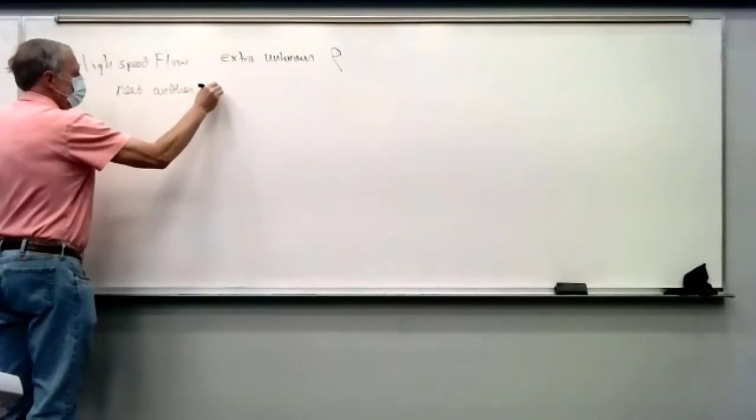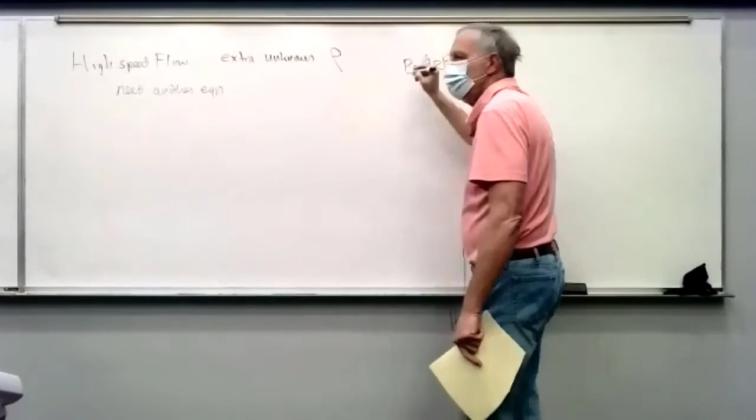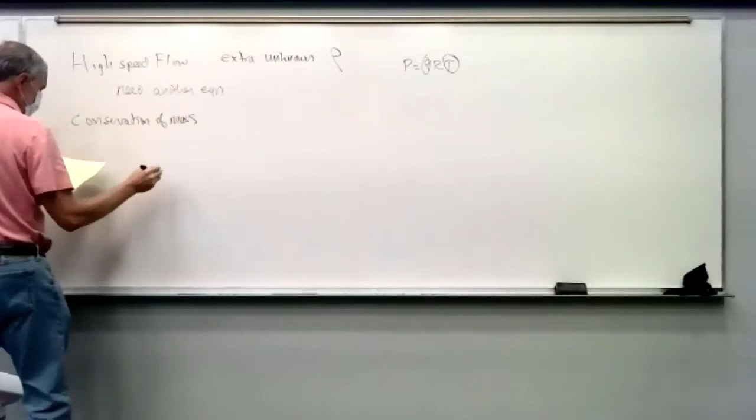And we do have ideal gas, but then that introduces another unknown, temperature, along the way. So we still need another equation. And right now we have conservation of mass. And again, this is for one-dimensional steady flow, but it relates these variables to the variables at spot 1 to spot 2. And then we have the momentum equation,

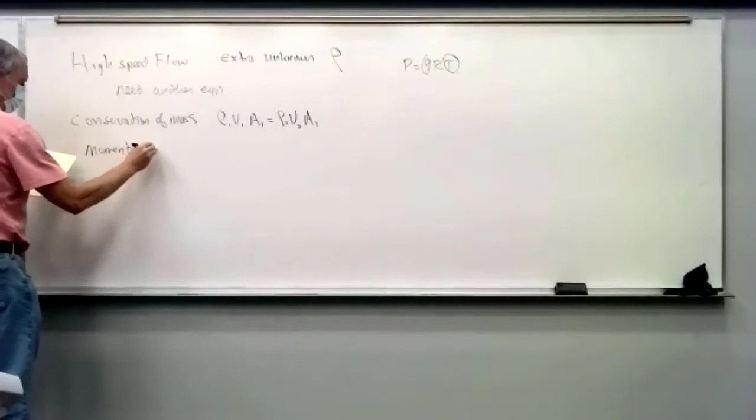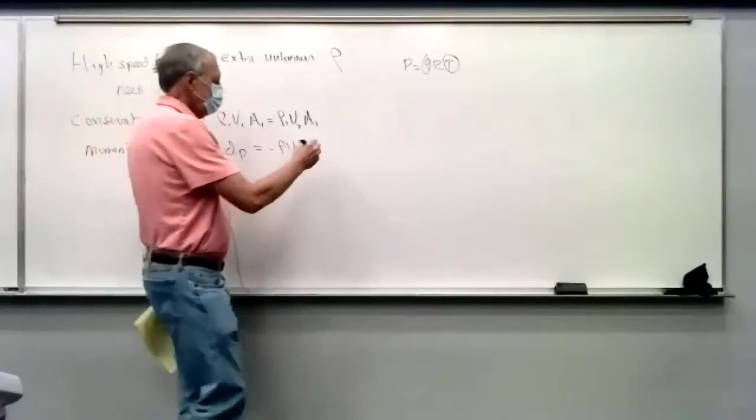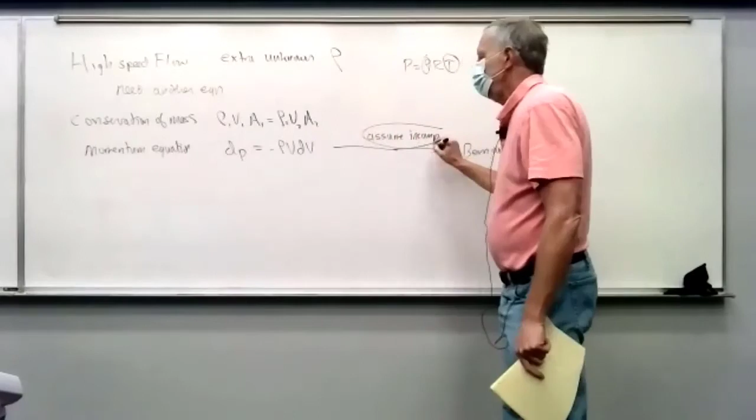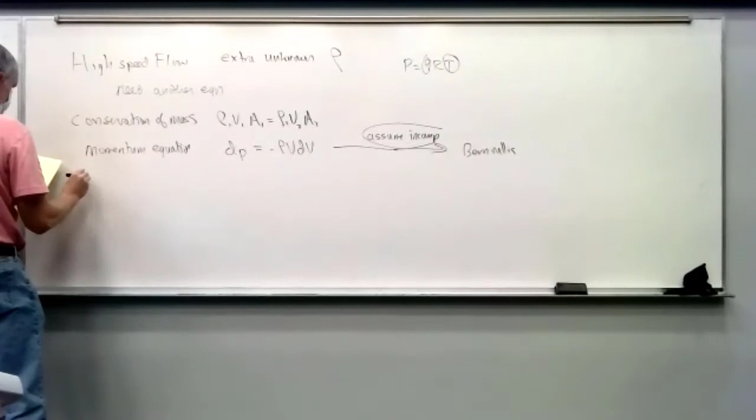which tells us how pressure changes related to velocity. And that's the one that if we assume incompressible, then we get Bernoulli. But if we don't have incompressible flow, then the density changes and we need another equation. So we're going to use that one, and then we need conservation of energy.

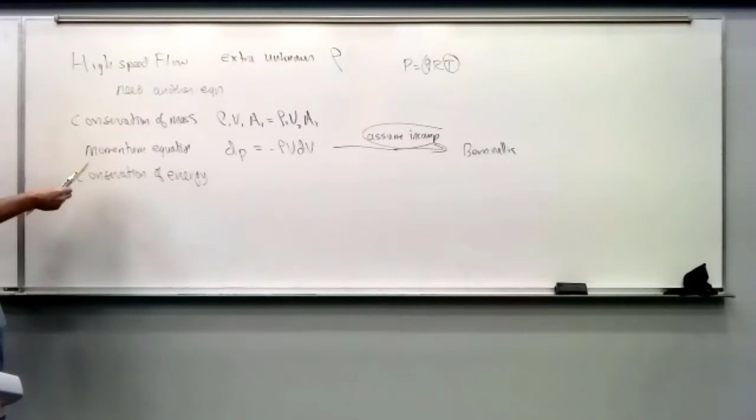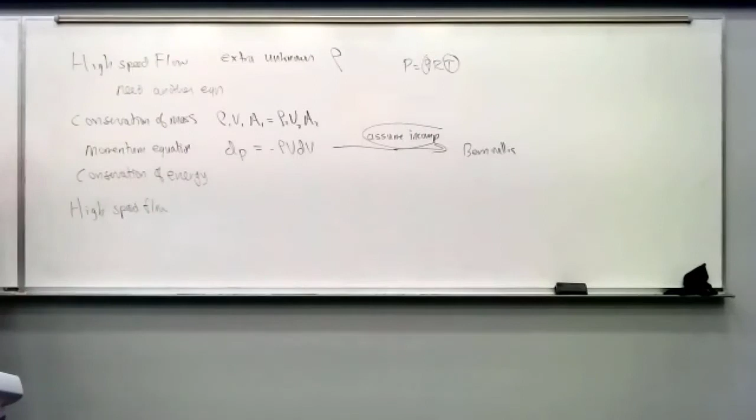And the main reason that this equation comes into play is if you have high-speed flow, so flow going really fast, and let's say we run it through a duct where it slows down, so the velocity is going down because the area is going up, conservation of mass. When that flow slows down, we get high pressures.

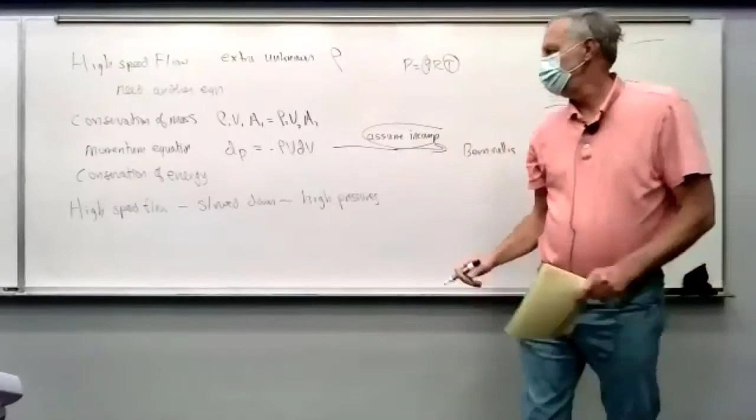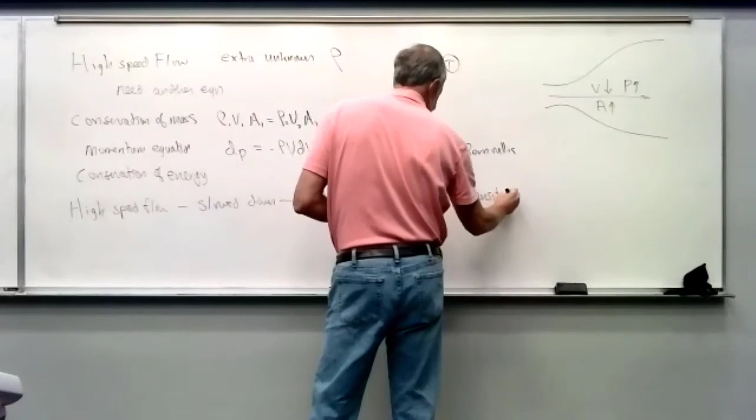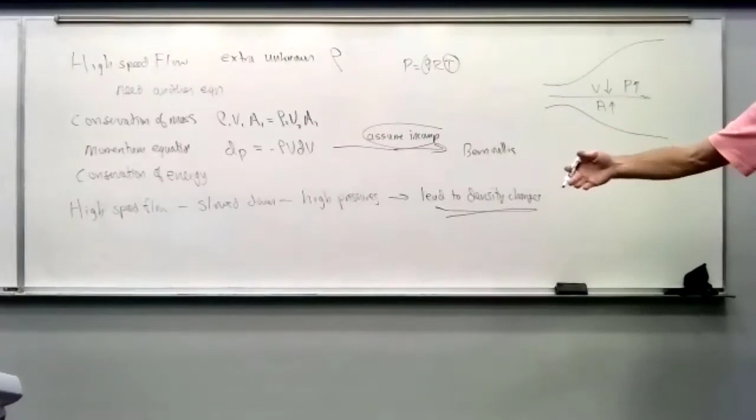Right? Remember, when the velocity is going down, the pressure has to be going up because that's the force that slows the flow down. We get high pressures, and those high pressures can lead to density changes. Remember, that's the whole deal behind incompressible versus compressible flow. If you don't have high pressures to squeeze the air, you're not going to get a density change.

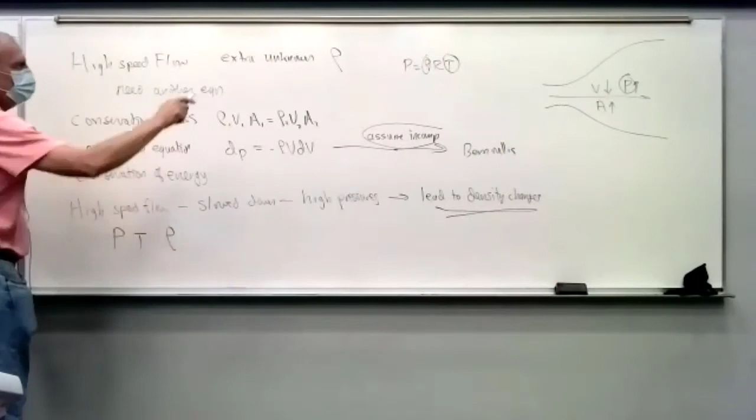That's why we said water is incompressible even at high speeds, because it does not compress even with high pressures. But for air, for a gas, you get high speed flow, it's slowed down, you get high pressure, and so you get density changes. And so we need to relate P and rho, not just with the ideal gas, but we need the conservation of energy. So this requires thermodynamics.

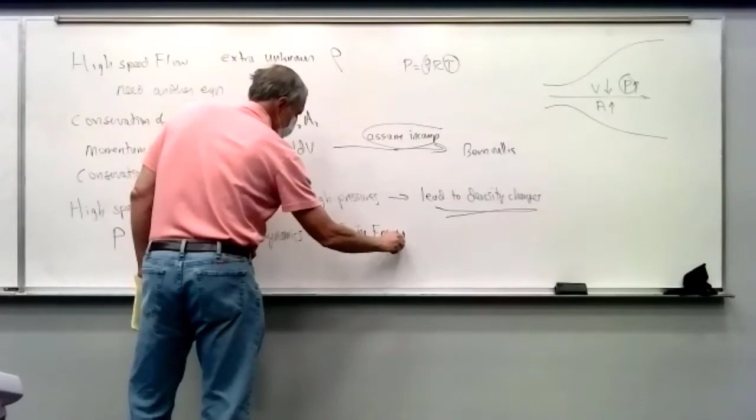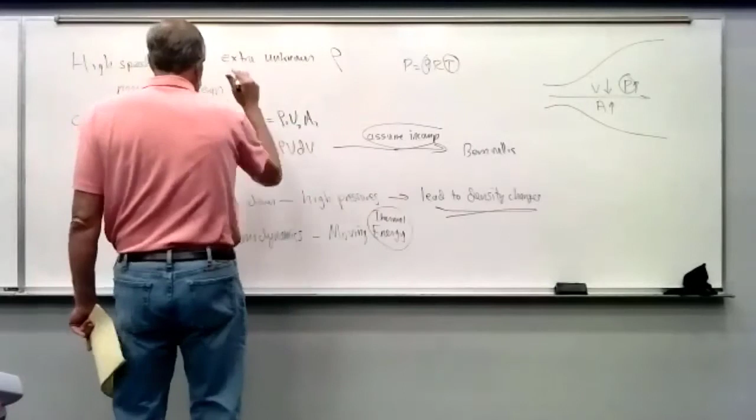Because thermodynamics is moving or changing energy. Thermal energy. And the conservation of mass, the momentum equation, this is dynamics. This is moving masses. So that's moving energy, this is moving masses, and that's just basic dynamics.

And then aerodynamics is named that way because it's moving air. So dynamics is moving masses, aerodynamics is moving air, thermodynamics is moving thermos, or moving temperature energy.

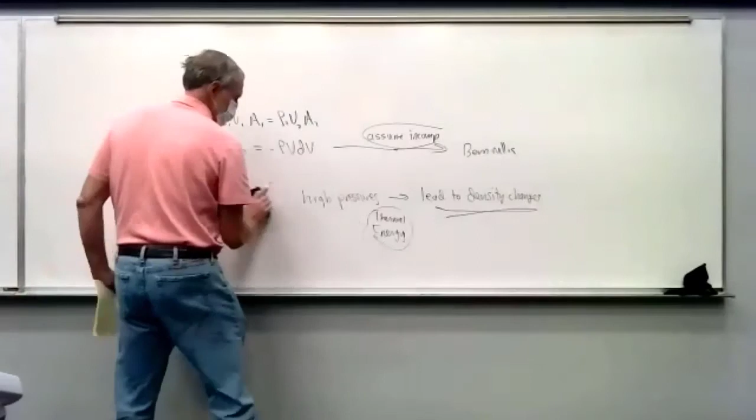And that's the first law of thermodynamics, is conservation of energy. So we have to remind ourselves of some terms in thermo. You guys are taking thermo now or have had thermo, right? So this is actually going to be easier than a lot of the stuff you do in thermodynamics. So here we have a system of gas molecules.

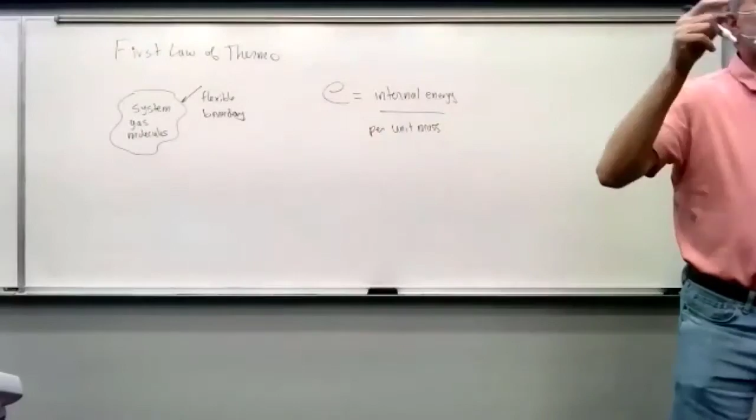And we say the system is contained within a flexible boundary. And we talk about the internal energy in the system, and it's internal energy per unit mass. Just like density is mass per unit volume, or specific volume is volume per unit mass, we don't have a chunk of stuff. We say, okay, we want to do it per unit mass.

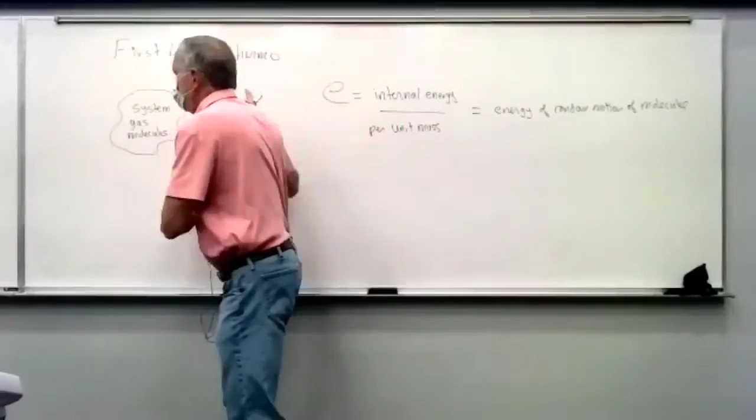And this is the energy of random motion of the molecules. So that's all the molecules moving around randomly. If there's ordered motion, if that whole system were to move to the left, that would be dynamics. But we're looking at the random motion as what we sense as temperature. So it's the energy per unit mass.

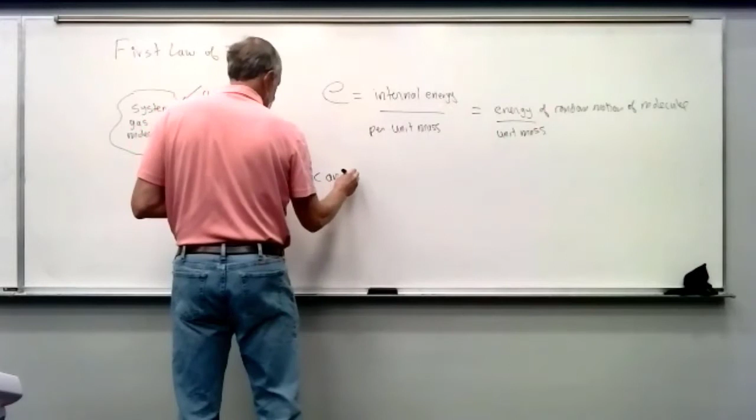And the first law of thermo says E can change due to two things. And the change is dE. So E is internal energy, dE is a small change in internal energy. And you can get a change in energy due to heat transfer in. And here, in is positive. So obviously heat coming in is going to raise the temperature.

And that's called δq. So it's a small change in energy. And it's per unit mass, just like everything else. And then we can do work on the system. In other words, we can push on the boundary, squeeze the molecules together. Temperature, density, pressure are going to change, and that's called work. And work done on the system is positive. So if we push and squeeze it, and this is per unit mass.

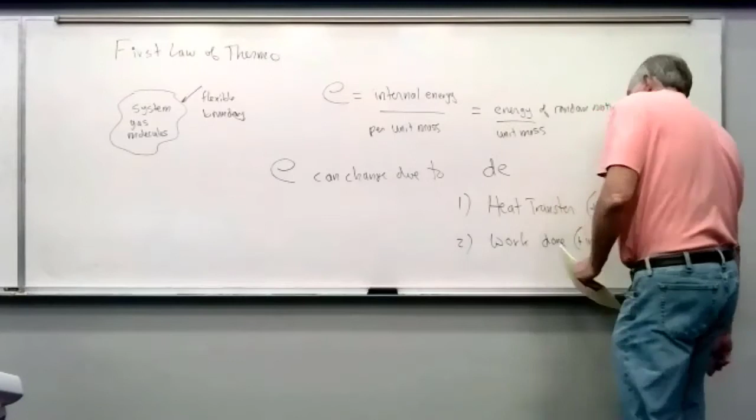All right, so we can change the energy by putting heat or by pushing on the system. And that gives us the first law of thermo, or the energy equation, that says putting heat in and doing work on the system changes the internal energy. This is the first law. It's the conservation of energy.

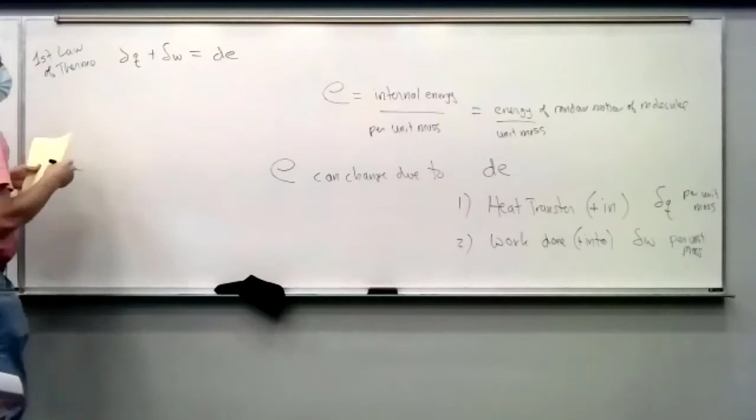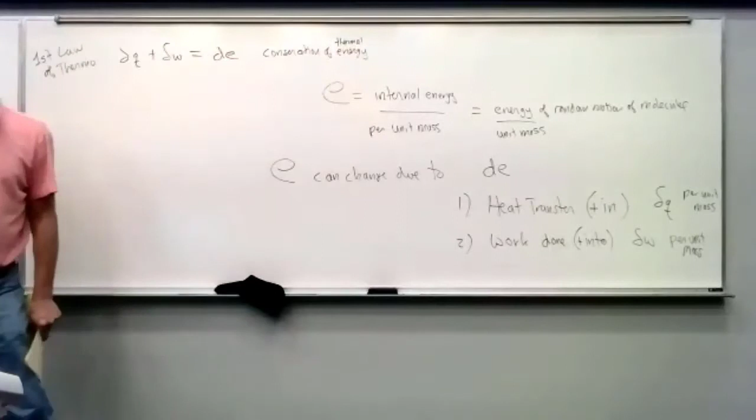So in this class and most fluids, that's what this is called: conservation of thermal energy. That's different than the conservation of potential and kinetic energy for dynamics that we talked about before. This is the motion of the molecule.

All right, so we look at this, and I don't see pressure, I don't see temperature, I don't see density. These are all our fluid variables. So at this point, it's like this is totally useless. But fortunately, we can put these terms in terms of the fluid variables. So that's what's next. The first one we're going to work on is the work.

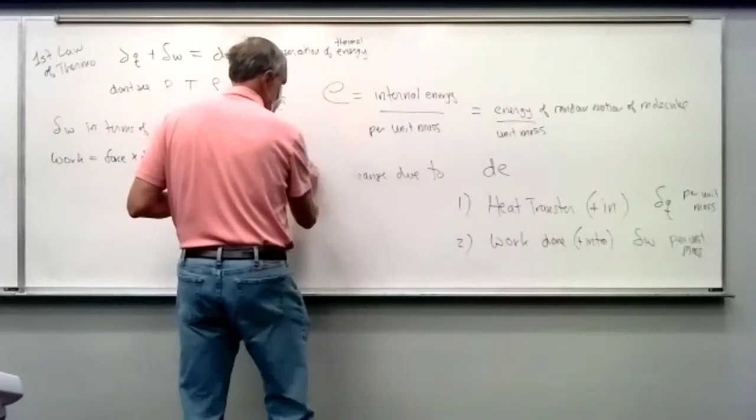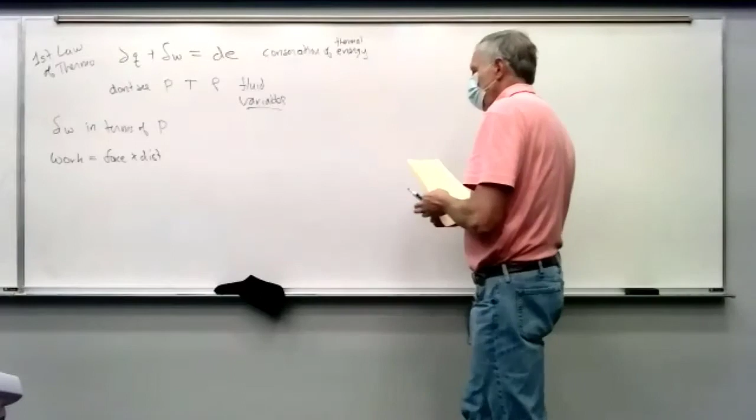And the work is going to be in terms of pressure because work is force times distance, and pressure is our force. So this applies to any kind of force times distance of our fluid, but I think a piston is the easiest way to see how this works. So imagine a container here.

So now I'm making the wall here rigid, but the piston here can move. And here we have a pressure, and so we're going to have a force on the piston. And if we allow it to move, if that force moves a distance ds, then that's our work. And that's work out. It's the system doing work out, so that's the opposite of work in, so that's going to be negative.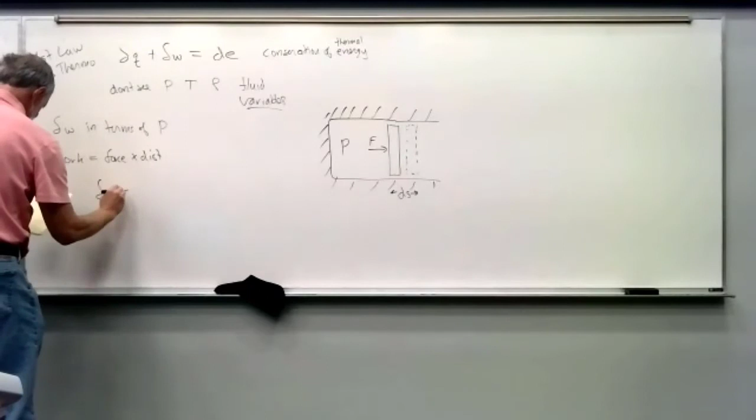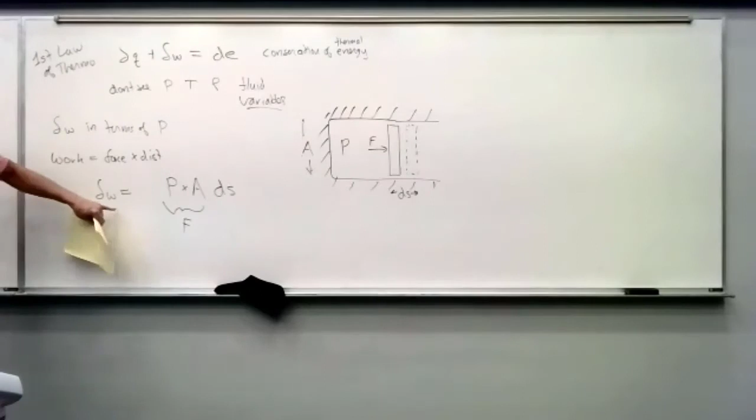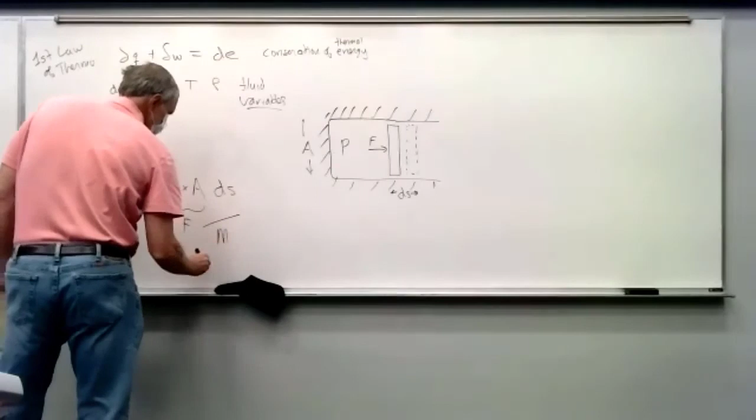So pressure times the cross-sectional area here is how we're going to get our force. So pressure times area gives you the force. And then the distance is that ds. And so we're doing a small work over a small distance. So that's going to give us our differential work. And remember, this is per unit mass, because that's how work is defined. So here's force times distance per unit mass.

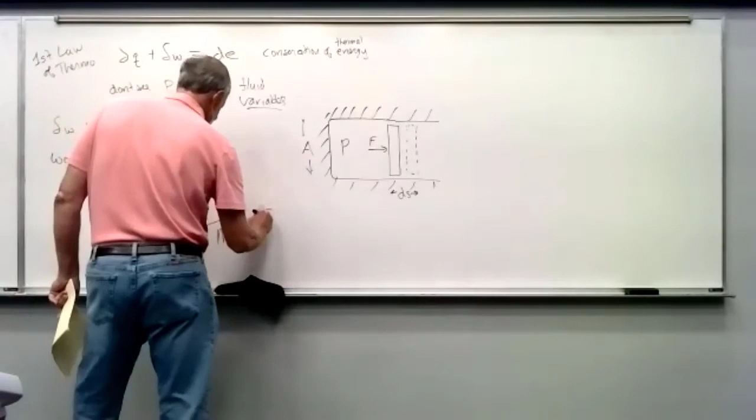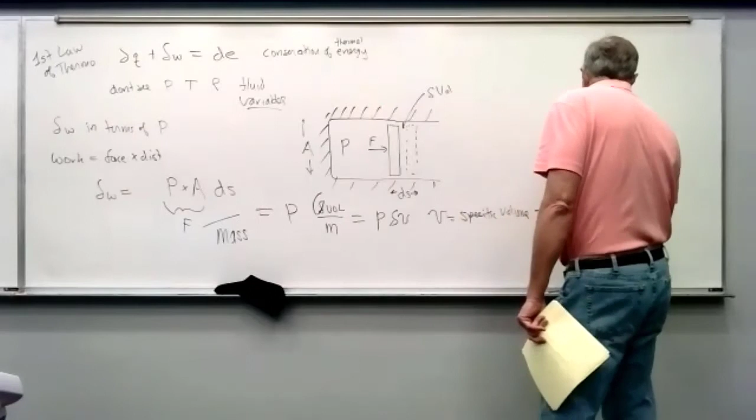And if we arrange this, area times distance gives us a change in volume. And so what we have is a change in volume per unit mass. But volume per unit mass is specific volume, which is volume per unit mass. So we need to write this as dv, because it's the change in the volume per unit mass. And we remember that this is just 1 over the density, because density is mass per unit volume.

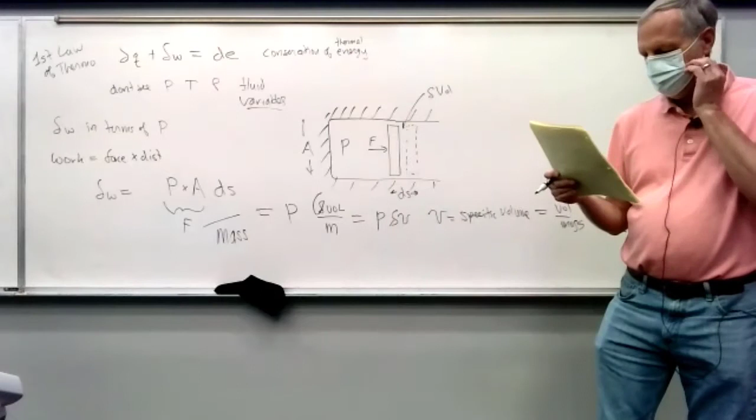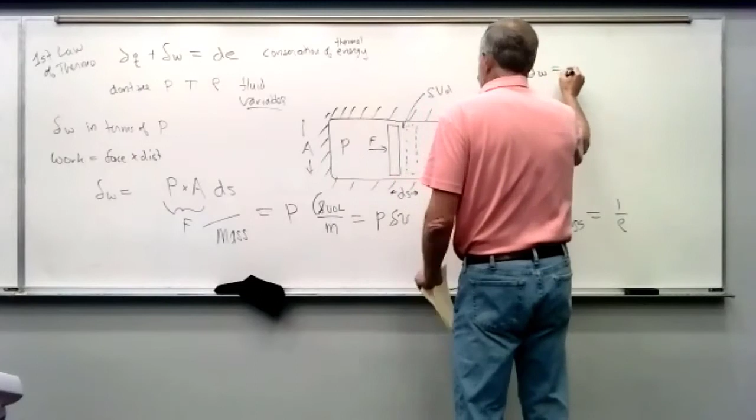And in fact, it's this reason why thermodynamicists use specific volume rather than density often. It's because in this work equation, you have 1 over rho instead of rho. So they just call that specific volume. And the units work out on this thing. So we're saying the change in work is P dv.

And pressure, this is newtons per meter squared. This is meters to the third per kilogram, so that's volume per unit mass. And so we get a newton meter, 2 of the meters cancel out, per kilogram. So that's a joule per kilogram, which is energy or work per unit mass.

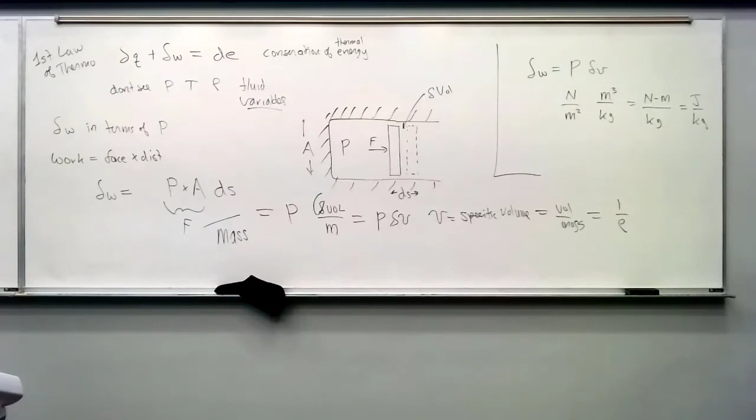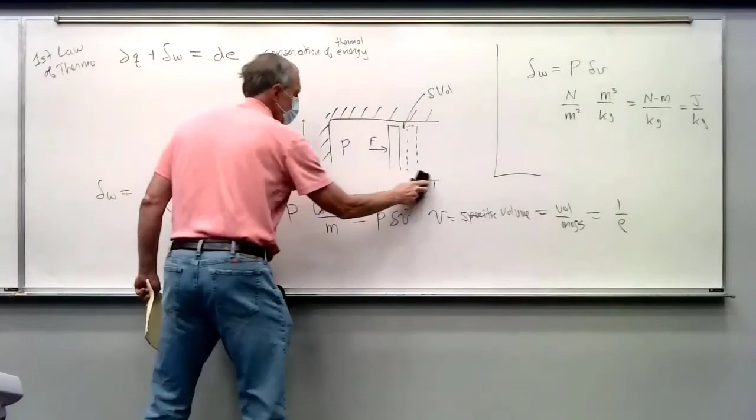All right, so that gives us the work in terms of pressure in the energy equation. It's just force, which is pressure, times distance, and the distance is related to change in volume, because if you change the volume, you get that distance change. Oh, we need a minus here. Remember that? Because it's work out. I lost my minus sign.

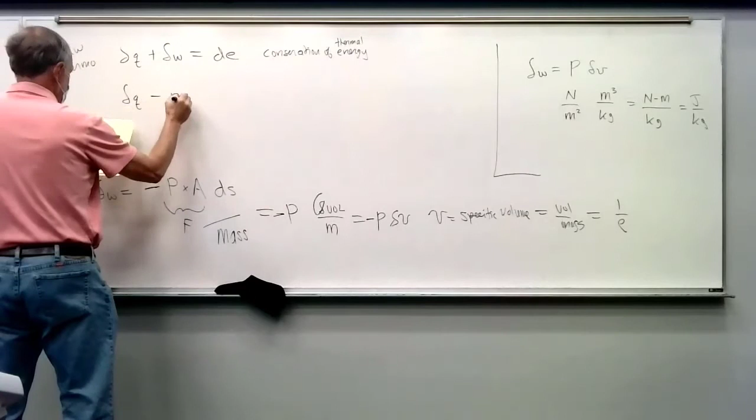All right, so flip it around. Put that on the other side. Then you get the first law for gases. So far, so good, right?

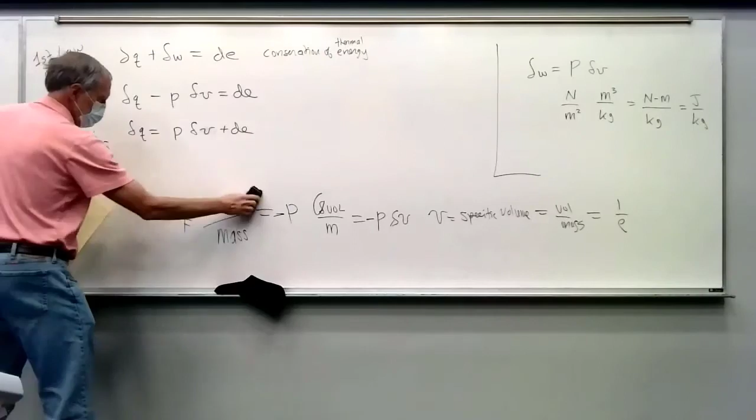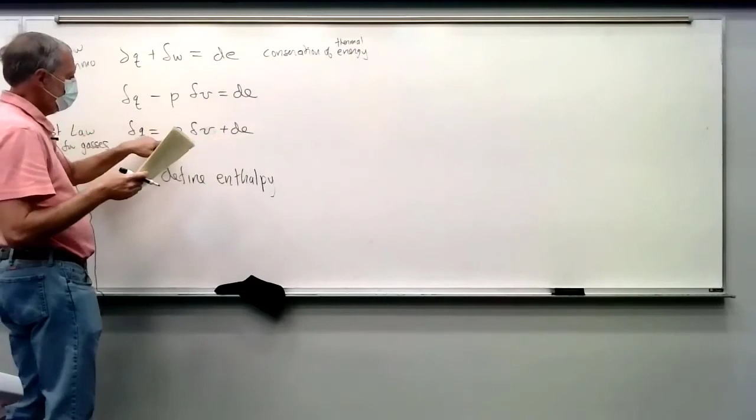And then the thermodynamicists have found that often you measure this combination of variables. You measure energy plus pressure times specific volume. So they just say, let's call this thing enthalpy.

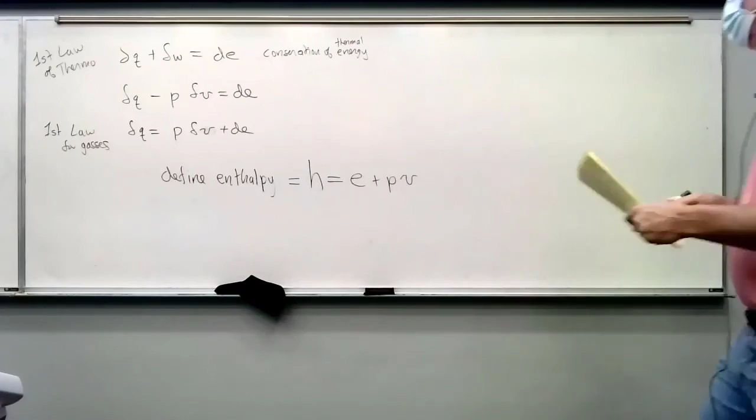I'll write it the other way around. Which always bugs me because there's nothing you can think about or look at, as far as I know, that is enthalpy in a system. It's not intuitive. But because these variables show up together all the time in the work, they say, let's define this H as E plus PV.

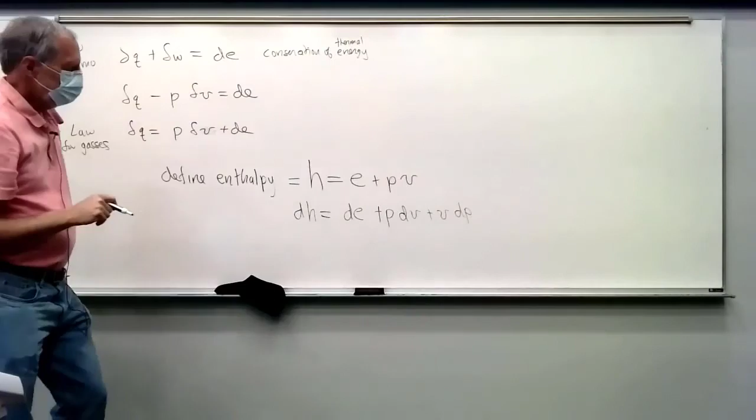And then the differentials, because we have dE and dV, we get... so I just use the chain rule there. And I don't know why I started writing del, that's just d. And that's d up here as well. So we can substitute. Here we got PdV and dE. So if you substitute up here, you can get the first law instead of in terms of energy, you can do it in terms of enthalpy.

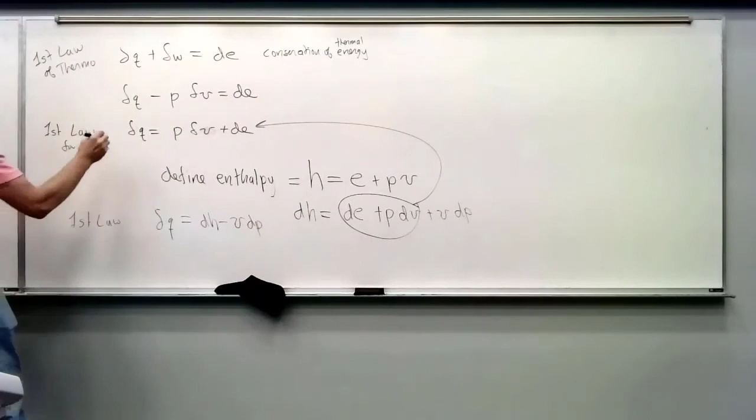And so you get the heat transfer is dH minus VdP. So both of these are the first law for gases. One is in terms of the internal energy E, and the other one's in terms of the enthalpy H.

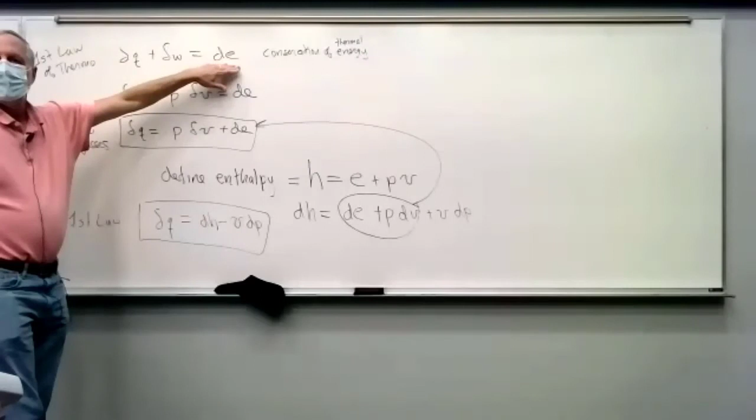All right, so this is a lot of theory in thermo, right? It makes sense because we said, well, conservation of energy is work plus heat going in gives us change in energy. And we've talked about this, but this internal energy is directly related to temperature. So what this is saying is that if we can calculate the heat in and the work in, we can tell how much the temperature is going to change. And then we can use the ideal gas law to tell us how much the density is going to change.

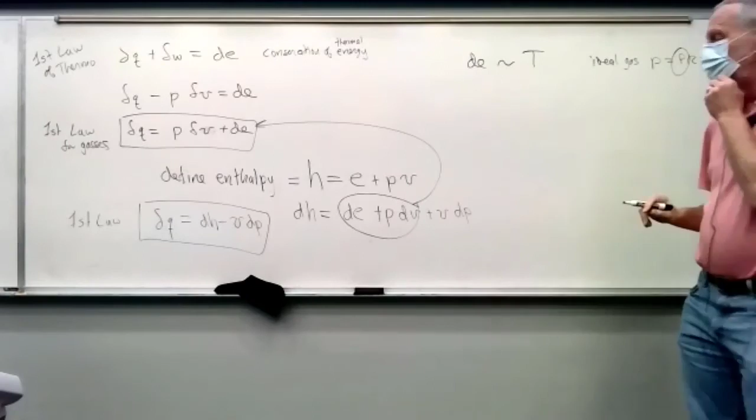So dE is related to temperature, and then we can use ideal gas to get density. And that's the whole goal here, is we needed another equation. So the chemists and the thermodynamicists have found out what this relationship is. So a change in temperature times this constant gives you a change in energy. And a change in temperature times a different constant gives you a change in enthalpy. And this is the formula that motivated, I think, defining enthalpy for real.

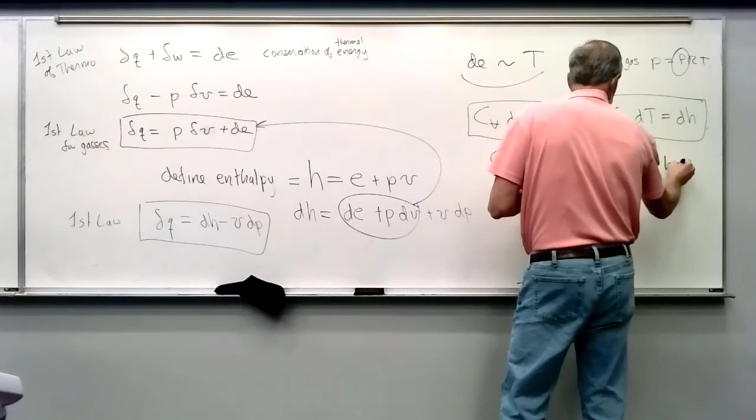And these constants are specific heat. If you remember from chemistry, specific heat is how much energy do you have to add to raise the temperature a degree per unit mass. That's all specific heat is. I remember doing an experiment where we had a chunk of, and we put a flame on it and we measured the temperature and then calculated how much heat went in. We got the specific heat.

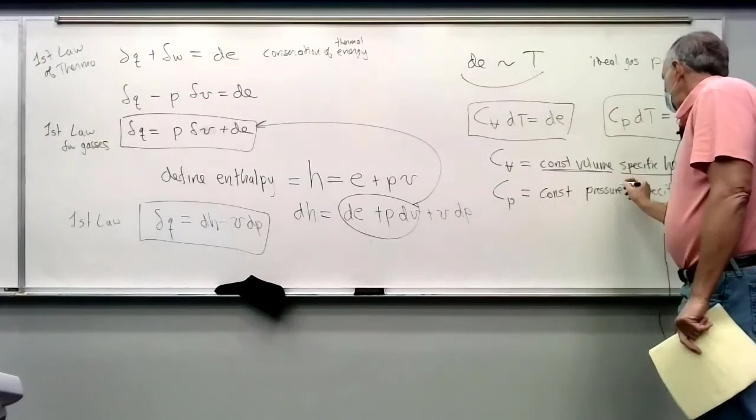For solids, both of these numbers are the same. For gases, it depends upon how you heat up the gas as to which relationship is true. And so this is called the constant volume specific heat, which means you trapped your gas in a solid container and you heated it up. And so you get a different change in energy related to the temperature. But if you put it in a flexible balloon and heat it up, you maintain a constant pressure, which means you allow it to expand as it heats up. You get a different specific heat.

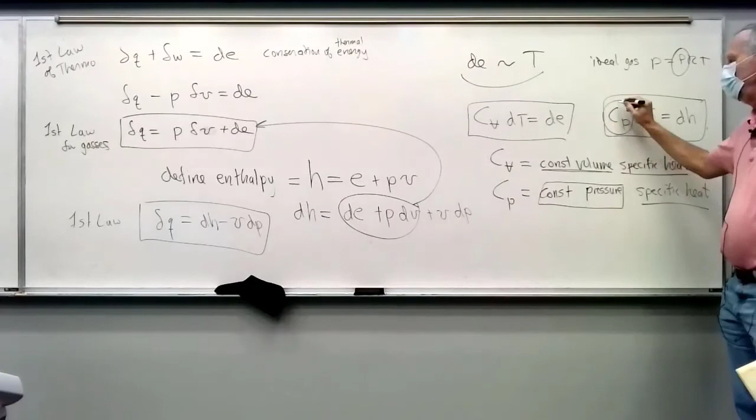And don't ask me why, because I don't understand it beyond that. I'm not a molecular chemist that can explain why these gases and how they behave in the atomic and bonding forces between them cause these two different things to happen. But experimentally, it does happen like that. But we're going to use these results, and we can put these in these equations of dH and dE. And now we've got temperature and pressure. We've got our fluid variables in here. And then we throw in ideal gas and we're good.

All right, how are we doing on time?

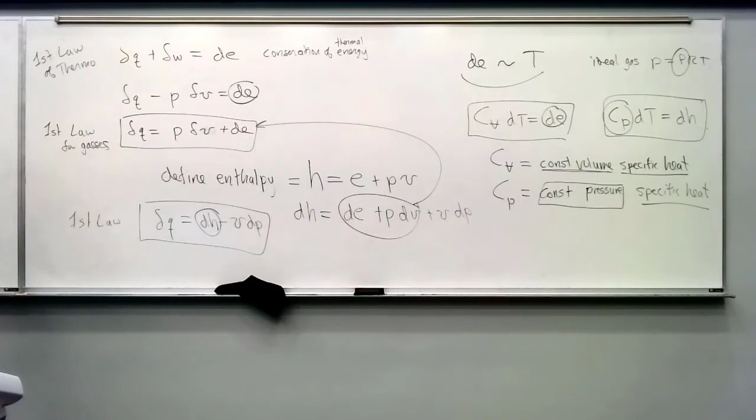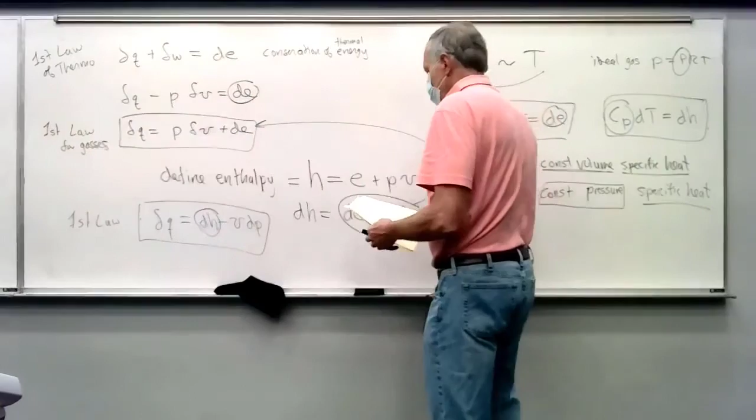Okay. So we need to do some definitions about how most gases behave in flow around airplanes. So hold on to these equations. We're going to need this one and these. And we're going to do the substitution. But we need to talk a little bit about the heat transfer, because that's another part of the equation. So we have relationships about heat going in and how temperature changes related to energy.

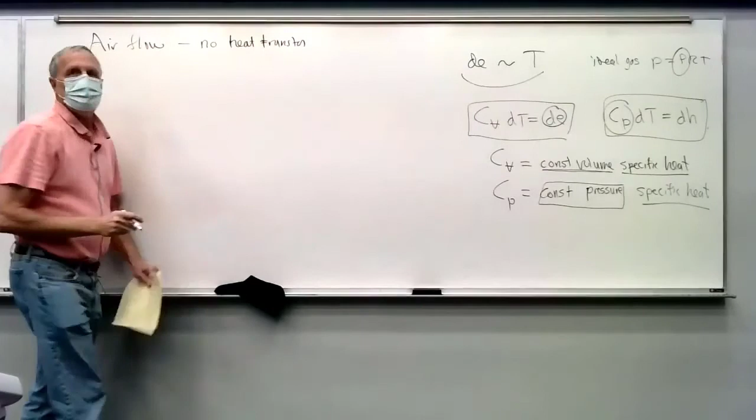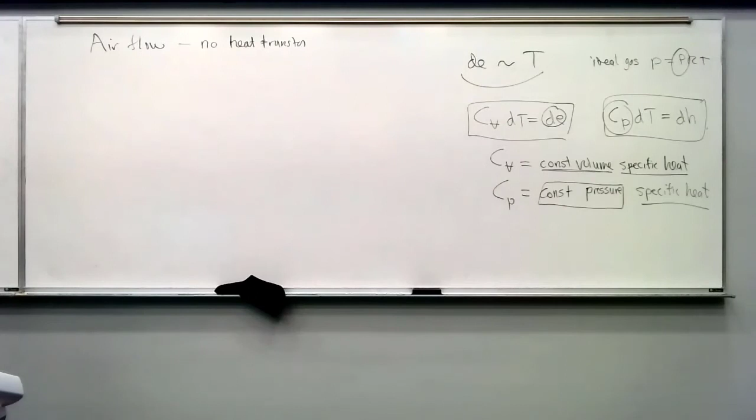Fortunately for airflow, most of the time we have no heat transfer, because there's nothing putting heat into the air. So forget the engines, right? We're talking about flow over an airplane wing. The flow goes over the wing. There's not a burner heating up the air. There's no hot surface to transfer heat to the air. It's just the air flowing from this point to this point. And if there's no heat transfer, we say it's an adiabatic process.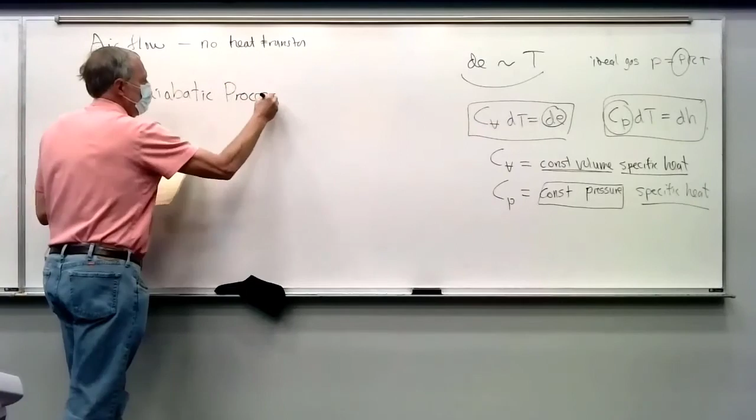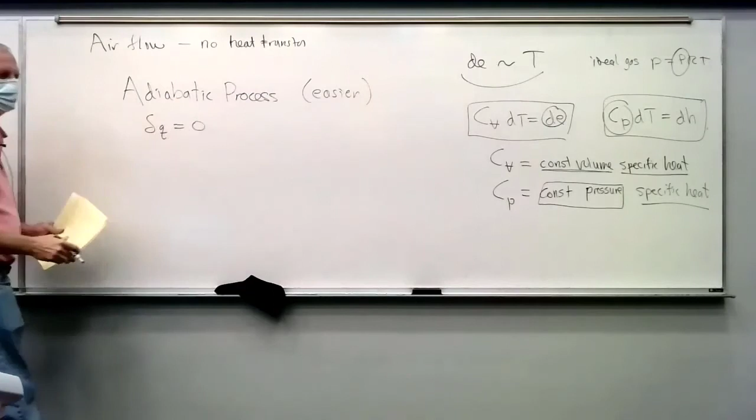And that makes things a lot easier than if we have to deal with heat transfer coming in, because we're going to set del Q to 0. Obviously, if we can knock a formula or part of a formula out and set it to 0, we're good. Now, this obviously is not going to apply to air going into an engine where there's combustion, and then that combustion energy is heat transferred to the air. That's a whole different deal where you have to include this. But for what we're talking about, flow around the wing or around an airplane, it's an adiabatic process.

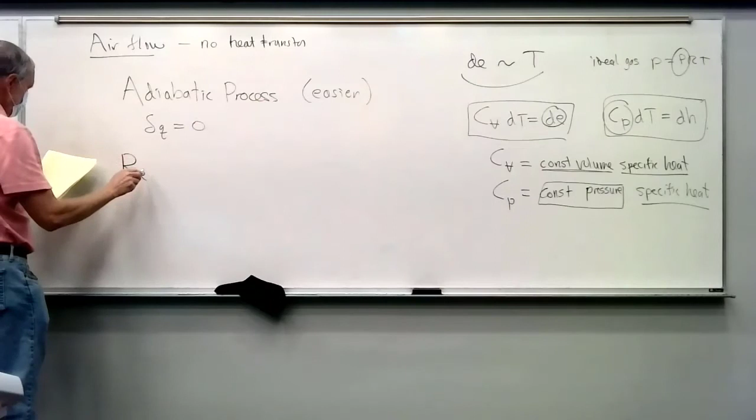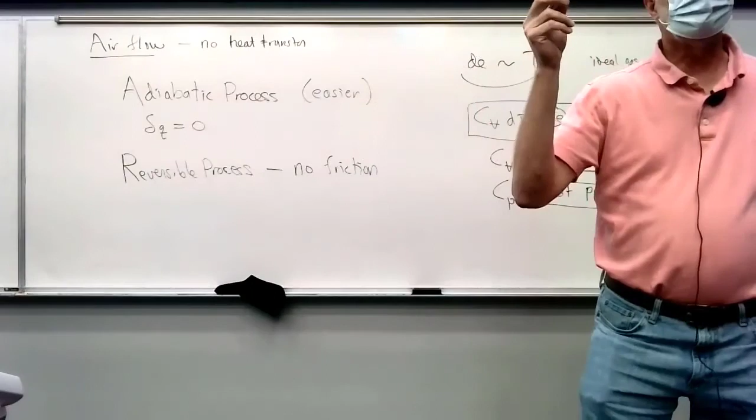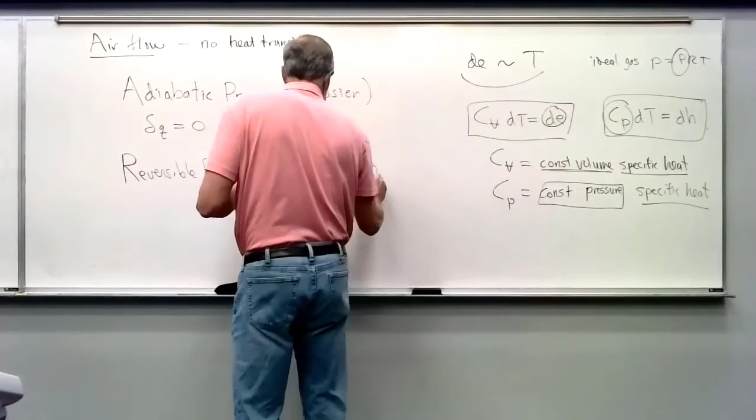And then the other big deal that you've learned in thermal is if you can assume a reversible process, that there's no loss of order, and we can say that because we're not near a surface where there's friction. Friction is an irreversible process, because friction slows something down, but you can't reclaim that energy to speed it back up. It just turns into heat. So we're going to say that we have a no friction reversible process, so we're far from surfaces. And far is a loose term. It means that you're not really close to the surface where you're getting the friction effects.

And so if you combine both of these from thermodynamics, you remember that's called isentropic. And that's the kind of flow that we're going to study. And it's the reason that this is easier than if you take a class in friction flow, where the equations are a lot more complicated. So we can say adiabatic, no heat added, that knocks that out. It's a reversible process, no friction. There's no viscosity. And so then we can take the equations and put them together. We're going to knock the heat transfer out and then combine them together to get some equations we can use.

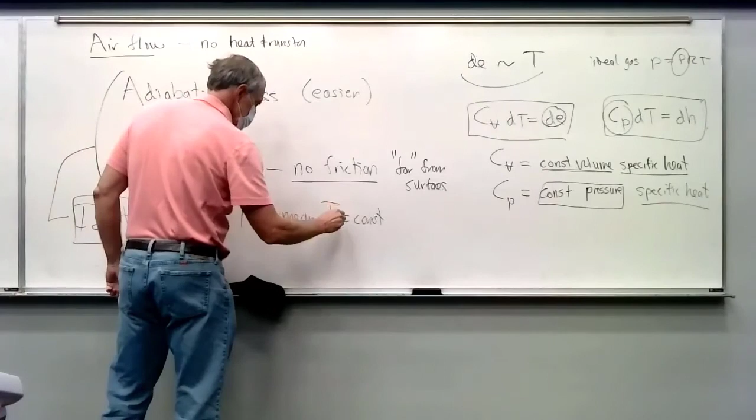Notice that just because we said there's no heat transfer does not mean the temperature is constant. It just means that there's no heat added, but if the air expands, even just due to ideal gas, we know the temperature is going to go down, right? So air can expand, the temperature can go down, the density can go down, pressure can go up and down. So temperature is not constant. It just means we aren't adding any extra heat so the energy doesn't change through the heat, it changes through the expansion and contraction.

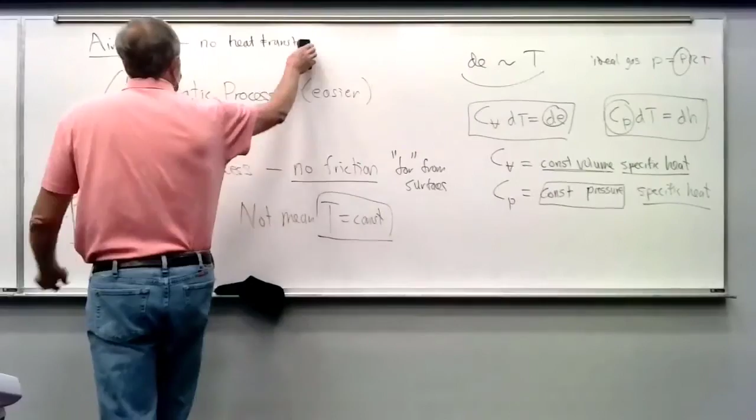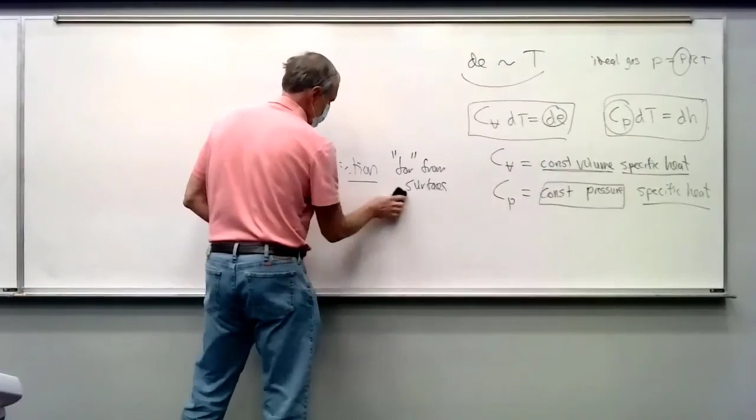All right, so let's stop here because this is a good stopping point. And next time we'll start with those two equations and those relationships over there, and we'll come up with the energy equation that we have to use for faster speed flow. So things get more complicated, but they're also, in some ways, more fun and interesting because of what happens in high-speed flow when you get near the speed of sound. We know that because in the past, people have studied higher and higher speed flow, and they found out that stuff happens in flow as it gets near the speed of sound. So we'll also talk about what is the speed of sound. That's the speed of pressure waves in the air. Pressure is a fluid variable, so we'll actually use pressure waves to be able to calculate the speed of sound at a certain

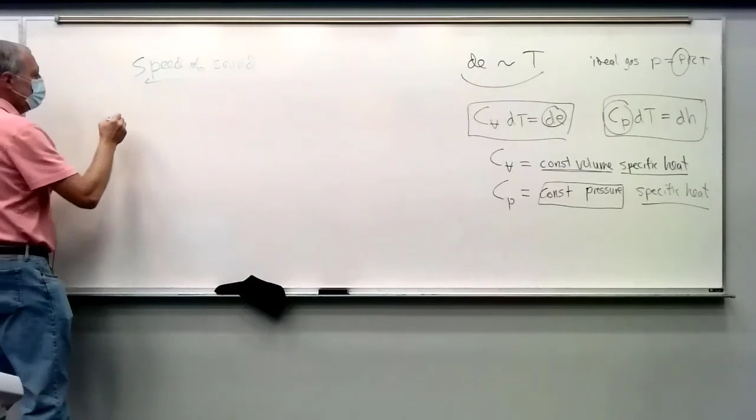altitude. Excuse me. Along the way, we'll talk about people setting the land speed record, where people were building cars that went faster and faster, and they started to have to include the effects of high-speed flow in what they were doing. We'll also watch a video about breaking the sound barrier. So I'm going to start working those into the lectures. Probably watch part of the video every time we meet to get caught up on that. And then we'll talk about Mach number, which is how fast you're going relative to the speed of sound. Talk about shock waves and other interesting things that happen. So let's call it good for today.